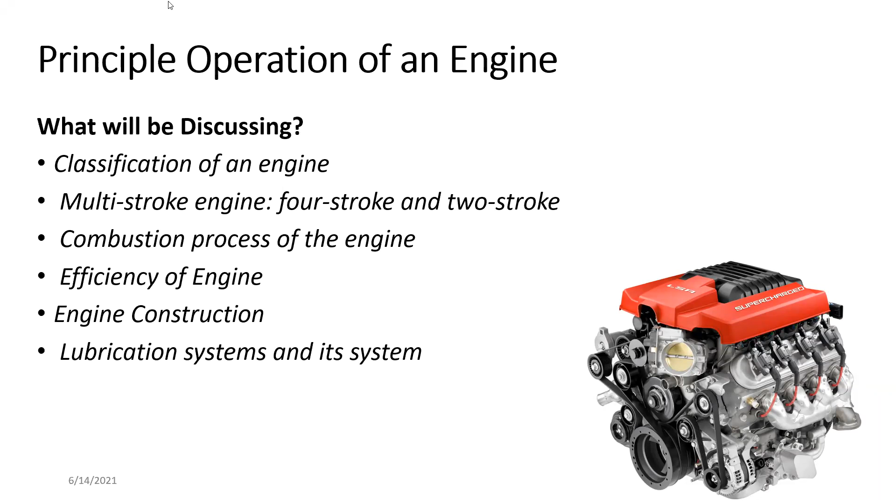First thing I need to explain is the engine. You have seen engines, and there are several types of engines. All of these engines utilize or convert chemical energy into mechanical energy. What we use in the vehicle is mechanical energy, while what we put into the engine as fuel is chemical energy.

After burning the chemical, combustion occurs. During combustion, heat is radiated, and that heat is absorbed by the combustion chamber, or it's the source for moving the piston in a normal engine. The same principle is used in different engine types.

All of these engines utilize and work in the same pattern. These engines, which work around the heat of the combustion process, are known as heat engines. They are classified differently based on type of fuel used, construction, and where combustion happens.

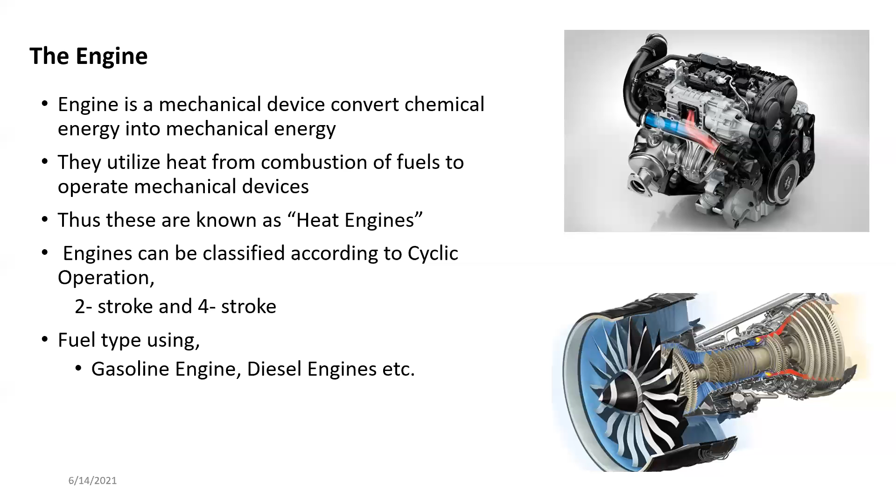Anyhow, since the one we are actually using at the moment is reciprocating engines or piston engines, we will be going deeply into discussing the piston engines, how they work, and systems like lubrication, fuel injection, ignition systems, and how airflow is affecting all of these things. We will be discussing most of these things in this module.

So the primary classification of any type of engine, as long as it's using any fuel, comes as external combustion and internal combustion engine. External combustion engine and internal combustion engines are very easy to understand or identify.

If an engine has a combustion process and energy generation or mechanical energy generation happening at the same place, such an engine is known as an internal combustion engine.

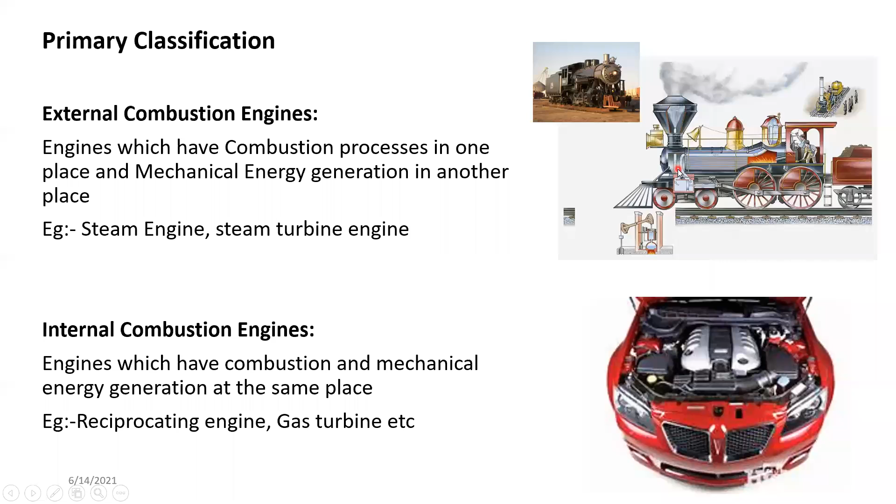In a normal automobile engine, it's completely different because the combustion is happening inside the cylinder itself. As a result, these are known as internal combustion engines.

Once we come to this external combustion thing, these are known as heat engines. All of these heat engines would be included into these two categories, external and internal. For your introduction, I have included steam engines and turbines, because in turbines the combustion also happens somewhere else, and the turbine is rotated in a different location. It's not that far, but it's two different locations. Then we have the internal combustion engine, which is the area we are actually concerned about.

So we have here Otto engine, diesel engine, and Wankel engine.

So, Otto engine, diesel engine, and Wankel engine. I'm not sure whether you are familiar with these names, but Otto engine means the petrol engine, diesel obviously is diesel engine. Wankel engine is a type of engine that can run on either diesel, petrol, hydrogen, or any type of fuel.

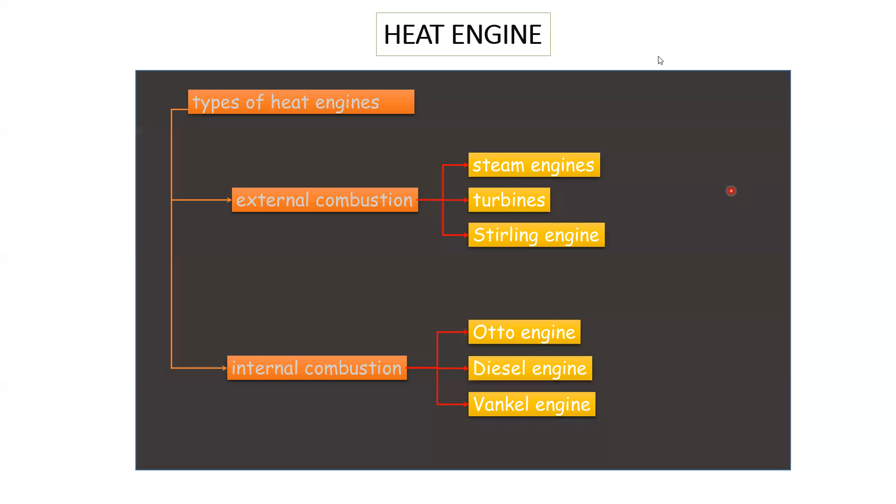So we'll go through this, and we'll discuss Otto engine, diesel engine, and then I can explain how the Wankel engine works.

So once we come to internal combustion and external combustion engines, there are advantages and disadvantages. If you compare these, internal combustion engines are compact and more efficient because the combustion and the mechanical energy production is happening in the same place, and it won't end up losing energy in the process, and basically it loses less material.

Most of the time the working fluid is a mixture of air and fuel. Working fluid is a term used in thermodynamics, which you will be learning later, to explain the type of fluid working inside a system. So the engine is considered a closed system, and the working fluid in that case is an air and fuel mixture.

Since these engines have mechanical components built in with the combustion, it's easy to start these engines. Internal combustion engines, since they are very compact and easy to operate, using them in automobiles is a very simple task compared to external combustion engines.

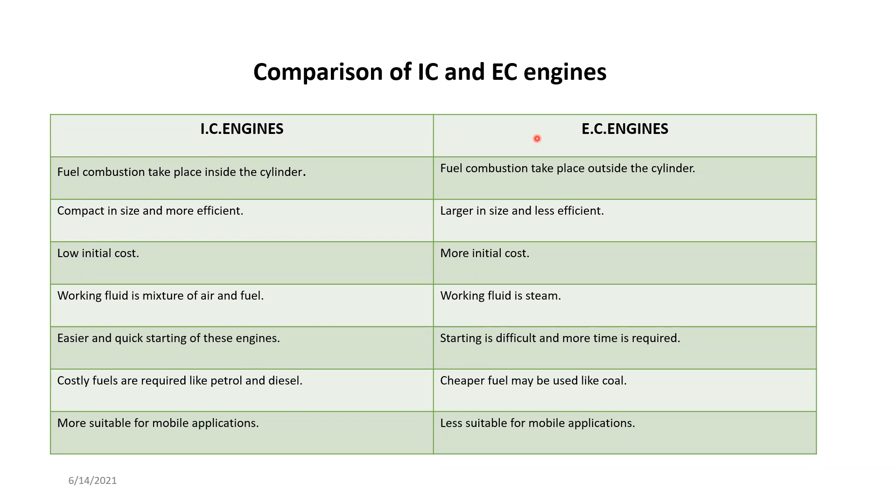Next, we move into something called a reciprocating IC engine. So if someone says IC, that means internal combustion engine, the short term for internal combustion. That's why it says IC. The type of engine used in the automotive industry is an IC engine, and these IC engines are reciprocating engines.

Reciprocating engines means it has a mass reciprocating, going up and down, or going from one place and returning back to the initial position before. So in a piston engine, or an internal combustion engine, there's a top position where the piston is moving, known as top dead center, and the bottom position where the piston goes down to and returns back.

So it's the reciprocating action of the cylinder, the action of this piston ends up creating mechanical energy. That mechanical movement will be converted into rotational movement using a mechanism known as crank slider mechanism. So crank slider mechanism, if I explain to you, this section is known as the crank slider mechanism.

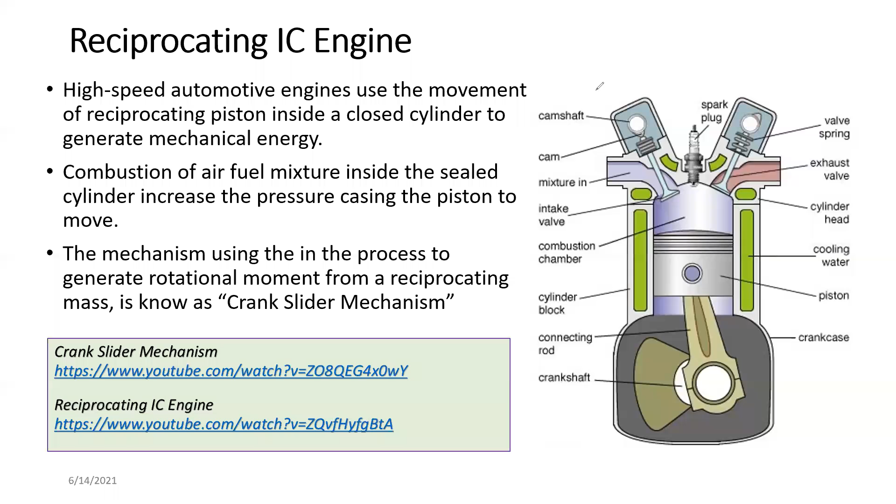And I know that you have learned these things, but I will just go ahead and discuss basic things also.

But this part, I don't think you have learned this. So even though this is the mechanical section of the whole engine operation, there's a thermodynamic side also attached to this, right? So there's a theory called the Carnot theorem, right?

The Carnot theorem says no engine operating between two heat reservoirs can be more efficient than a Carnot engine operating between those same reservoirs. So the Carnot theorem actually explains the thermal process of an engine. It explains how an engine is working, how the heat is flowing and how mechanical work is done.

So basically, the Carnot cycle is a very complicated topic. It's actually simple, though it's complicated. The basic idea of the Carnot cycle is to come up with a theoretical cycle to explain how the heat engine is working. If we consider any type of heat engine, all of these heat engines follow this process one way or another, right? So let me explain how this Carnot cycle works.

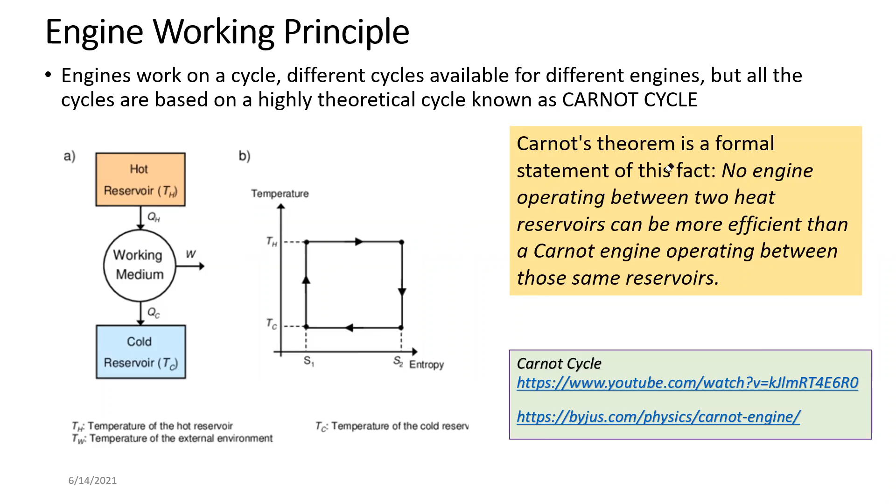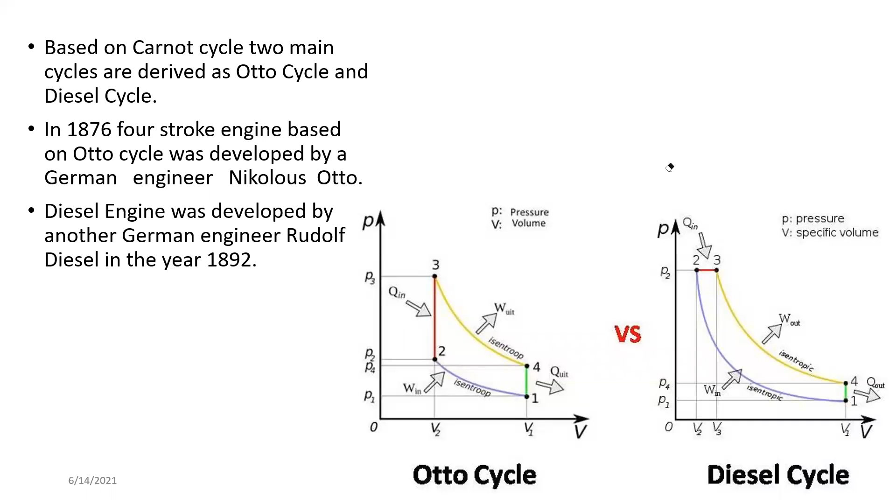But they were somewhat changed based on the practical limitations that we have in an engine when it is operating, and the shape of the graph will be somewhat changed with the actual engine. So in 1876 the four-stroke based Otto cycle, and in 1892 engineer Rudolf Diesel developed the diesel engine. Okay, so now we come to the Otto cycle.

So I know that you understand the four cycles, right? I know you understand the four strokes. So this is actually known as the sequence, right? So in a petrol engine and a diesel engine, there's a difference. The difference is in a petrol engine, you actually have to spark it, right? And in diesel engines, you don't have to spark, it will auto ignite, right?

It will auto ignite. So let us go ahead with the Otto cycle, and we'll discuss the diesel cycle next. I'm not actually going to go through what is suction stroke, compression stroke, power stroke, and exhaust stroke. You already know these four strokes, and you already learned this in your practical session as well. So rather than wasting time on something you have already learned in your advanced level, as well as in your practicals,

what I'm going to do is just discuss the graph. So basically the Otto cycle and diesel cycle, or any sort of cycle like this, is shown in a graph. This graph shows how the pressure and volume vary inside the engine. So it's like this. I'm going to draw a piston in a combustion chamber. Okay. So this is one position the piston can be, and the second position, the piston will be moving up here.

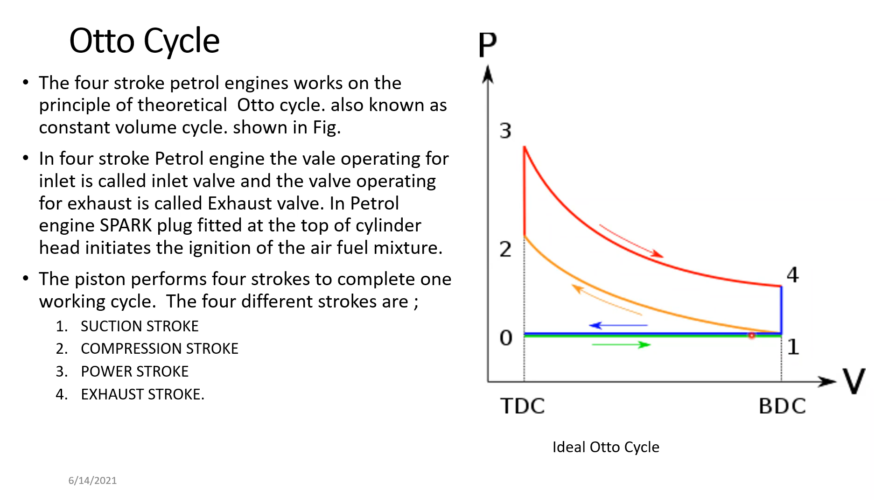So 0 to 1 is the suction stroke, and 1 to 2 is the compression stroke. 3 to 4 is the power stroke, and 4 to 0 again is the exhaust stroke. This particular operation is shown very well again in here. The same thing that I explained is here: 0 to 1 intake, compression, spark, constant volume combustion.

Notice that at this time the valves are closed, so as a result, the piston will move. If you look at the graph, you can see the one we discussed already, which is called the PV diagram. Next to that there's another one, called the actual PV diagram, meaning the PV diagram we get if we practically draw it from an actual engine. As soon as you see it, you can identify a lot of differences.

The main difference is there's no straight line; it's not very neat, it's more like two loops. The bottom loop is the pumping loop, where the piston itself takes in the intake or pumps the exhaust out, so it's called the pumping loop. The power loop is where the power is generated, where the compression and power strokes happen. That's why that section is considered the power loop, right?

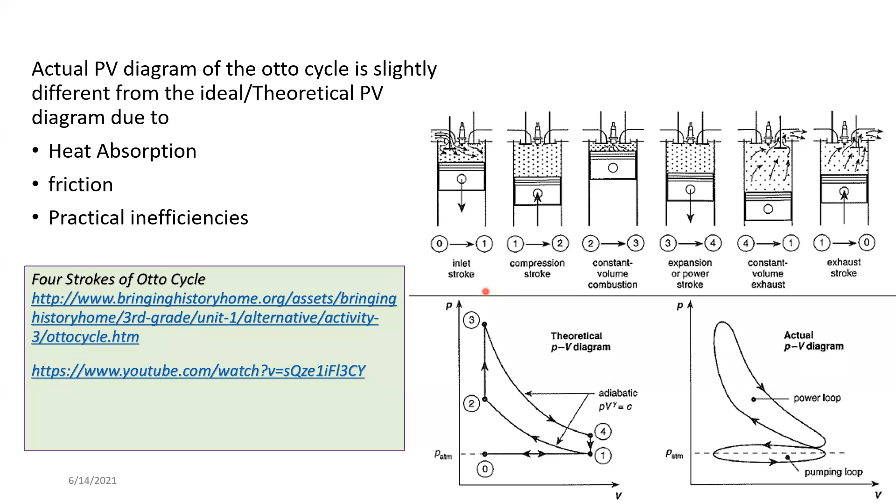So, the four-stroke diesel engine. The diesel engine also follows the same sequence, not the same cycle. Suction, compression, power, exhaust is the same sequence, but it operates in a slightly different cycle. If you move your attention to the graph shown to your right, 0 to 1 is as usual, 1 to 2 is as usual, but 2 to 3 is somewhat different.

Somewhat different meaning, if you can remember, earlier in the petrol engine or the Otto cycle, the graph was somewhat like this.

Okay, give me 1 second.

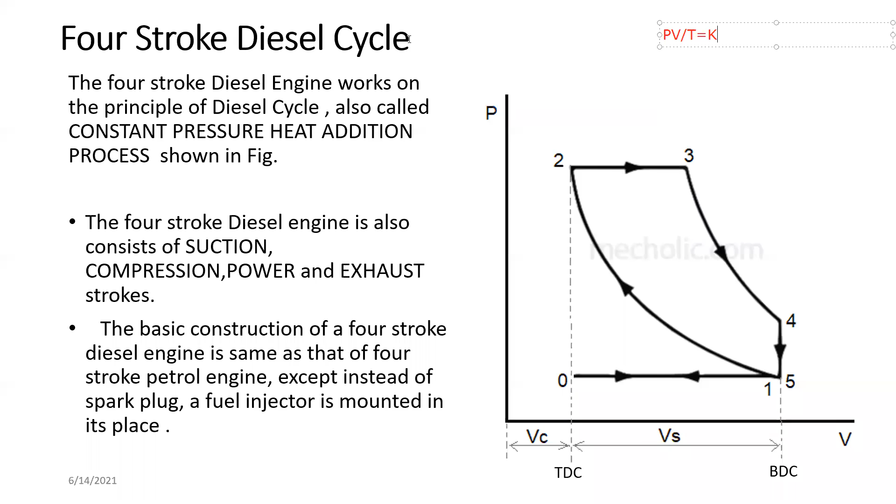That's why these are known as compression ignition engines, because they are ignited by compression. I will fix this image; until then, we'll go to the next slide.

So we've discussed the four-stroke engine until now. There are advantages and disadvantages, so let me discuss them.

These engines have a dedicated lubrication system, and since fuel is provided once for every 4 strokes, that means once for every 2 revolutions of the engine, this reduces the amount of fuel needed. There's no oil in the fuel, so less pollutants and cleaner air, and emission controlling is very easy.

On the disadvantage side, since you need a separate lubrication system, it's expensive with a complicated construction and more components needed, because you need a valve system or valve train to operate the valves.

The engine always has to be operated in a horizontal position, because the lubrication system works on gravity flow. It uses gravity to return the oil back to the oil sump.

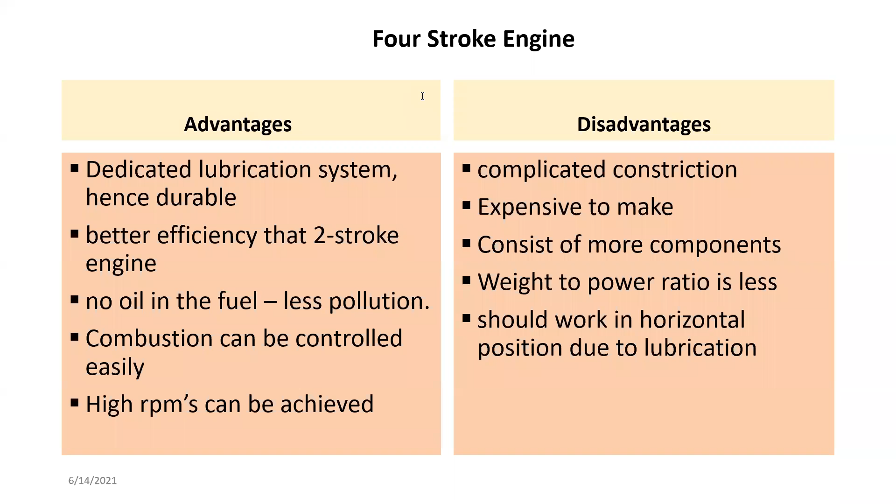So diesel versus petrol, if we consider these things, the basic difference between the two is the compression ratios. For a petrol engine, compression ratio goes from about 8 to 12. For a diesel engine, it's from 18 to 25 approximately.

Diesel engines are very lazy engines, and their RPM is lower compared to petrol engines' RPM. The reason is diesel engines need a particular time to combust, since it's not ignited directly - it will auto ignite once it reaches the correct temperature and pressure, so it requires a little bit more time.

In comparison, petrol engines have a very fast combustion process, so they can actually reach up to a higher RPM.

Diesel engines are known to have a higher torque value. Torque means the rotating force - how much force it can deliver when it's rotating. That torque value is actually higher in diesel engines even at lower RPMs.

That's mainly due to differences in engine construction, because diesel engines need to have a higher stroke length, since the compression has to be higher and it needs time to combust. Because of that, they need a higher stroke, producing higher torque values.

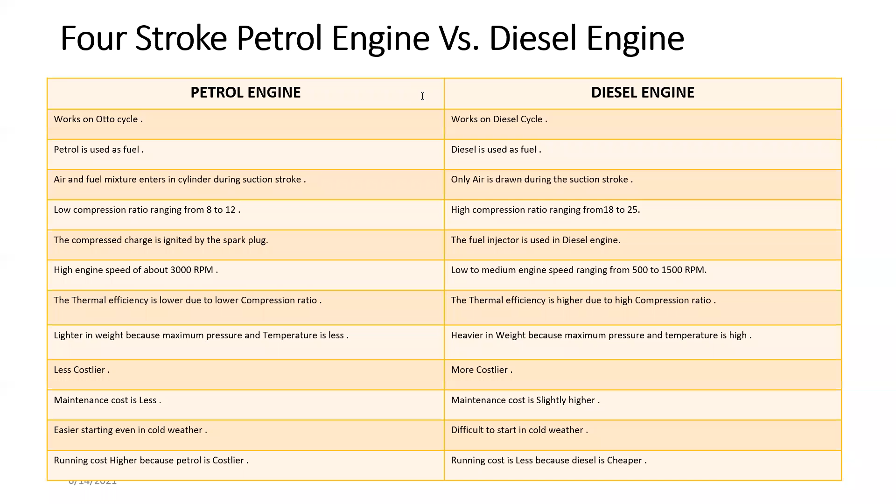Diesel engines are more popular as commercial vehicles than usual passenger vehicles or automobiles, due to their rough nature when running, and the low cost of diesel fuel compared to petrol fuel. Petrol engines have a more refined feeling because of low vibrations, as they operate at lower compression ratios.

A two-stroke engine is operating-wise very similar to a four-stroke engine, but instead of using conventional valve systems, they use something called a transfer port with a sliding valve system. As you can see here, the carburetor line coming from the air fuel intake port is here.

This is actually a valve, even though we never call it that. The valves in a four-stroke engine are called poppet valves, but these are called sliding valves. There's another type called rotating valves, which aren't in use now but were used long ago in World War II aircraft engines.

So this is more like a sliding valve where the piston itself acts as the opening and closing mechanism for the valves. As you can see, when the piston moves up and down, this section is closing and opening. Once it's open, the air fuel mixture comes in and goes to the crankcase. And once the exhaust side opens - these are called ports too - the exhaust port is also closed at this point.

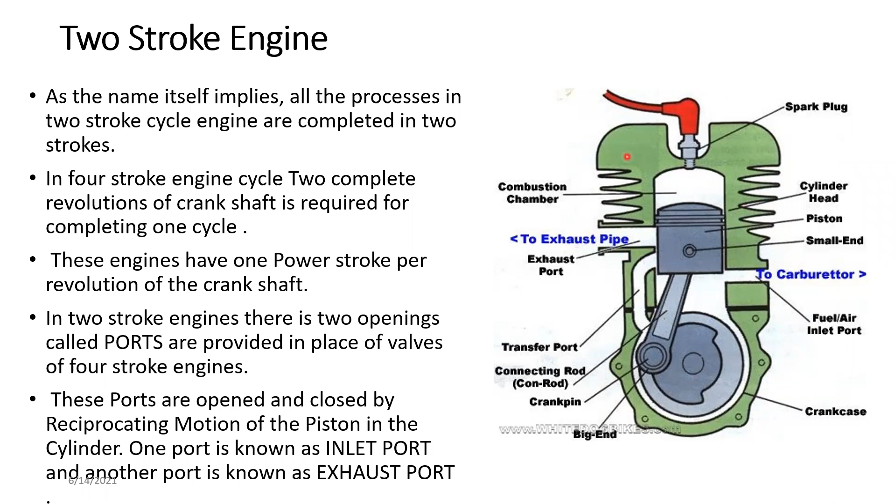This is the basic process of how it works. The air fuel mixture comes here, goes up to the transfer port, and it's closed moving upwards. The air fuel mixture inside is pressurized, then sparked. Combustion moves downward, the piston comes down opening the exhaust port, which forces the exhaust gas to go out.

While once it reaches the bottom dead center, the intake port is actually closed at that time, but the transfer port is open. So the fresh air fuel mixture will move into the combustion chamber at this moment. This actually combines two cycles, suction, exhaust and compression, into one.

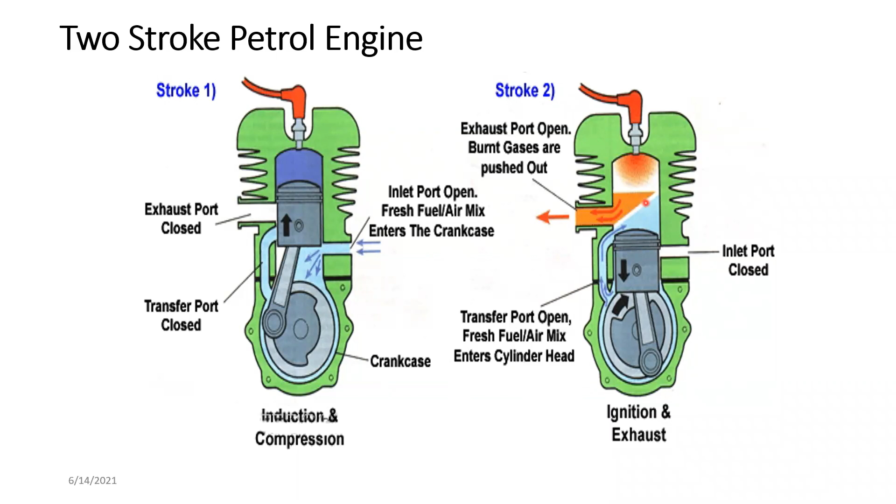The diesel type of engine is somewhat different because it has a small valve attached to them, but the operation is basically the same.

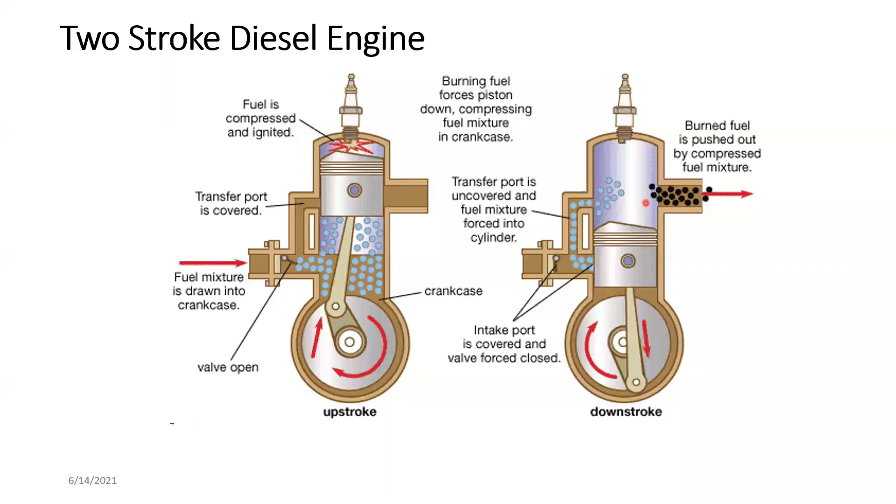So, two-stroke engine advantages and disadvantages. Basically it's simple, low construction cost, power stroke for every revolution, and can work in any orientation. There's no separate lubrication system; lubrication has to be provided with the fuel itself.

Since it's lightweight, the power to weight ratio is actually higher compared to other engines. And since it lacks a dedicated lubrication system, lubrication cannot be controlled very well, so it wears out faster.

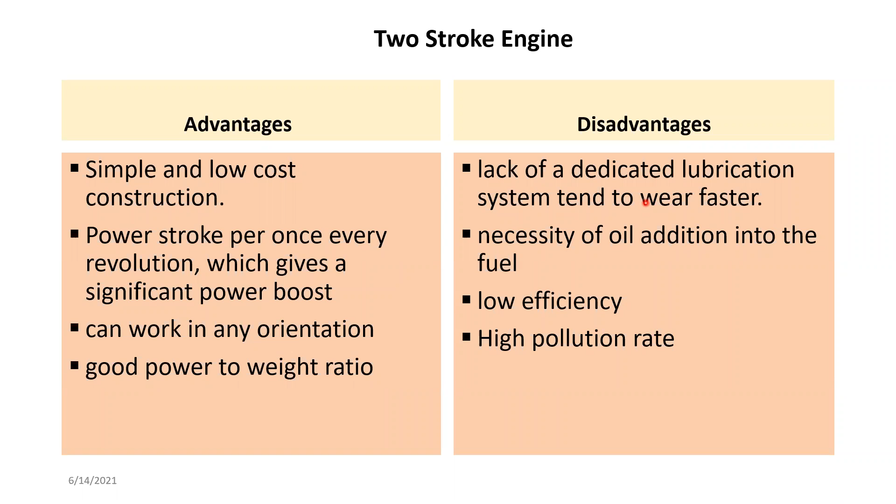There's a necessity of oil addition, which creates low efficiency as well as a high pollution rate, because pollution could not be controlled due to the oil being added all the time without any control in the engine. Because of these issues related to low efficiency and high pollution rates, two-stroke engines are not much used in automobile engines.

If we compare four-stroke and two-stroke engines, two-stroke engines are okay, but four-stroke engines have superior characteristics: higher thermal efficiency, better fuel control, low fuel consumption, low lubrication oil consumption, and lower emissions. Because of that, four-stroke engines are very popular.

With the newly developed manufacturing technologies and design software and applications available now, four-stroke engines can achieve even higher efficiencies and deliver almost the same amount of power as a two-stroke engine. So at the moment, because of that and other reasons mentioned here, four-stroke engines come up as the winner in this case.

But that doesn't mean two-stroke engines have no place in the world. They're still used especially where small light engines are needed, for example a snow blower, a tree cutting machine, or lawn mowers. These use two-stroke engines because of their lightness and fewer components.

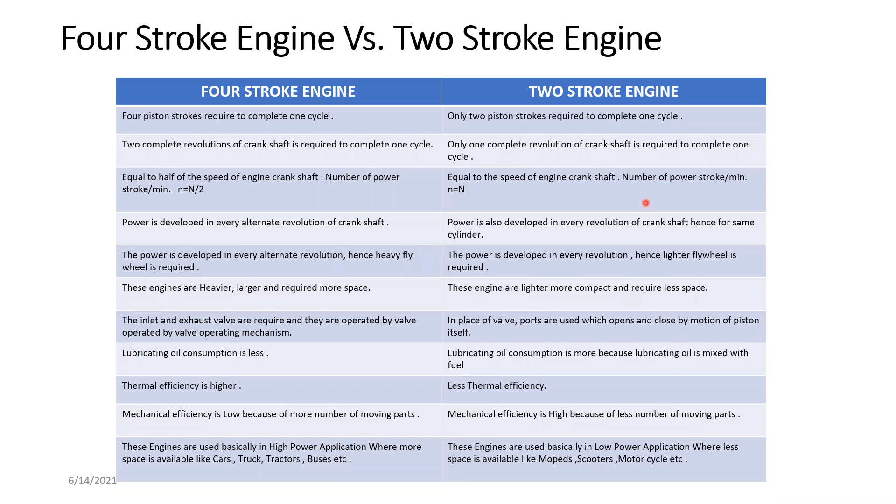Next we move into basic terminology. You likely already know about top dead center and bottom dead center, which is the section mentioned here. In addition, we have clearance volume and swept volume, also known as stroke volume.

The clearance volume is the whole volume between the top of the piston and the top of the combustion chamber. This whole area is actually your combustion chamber. This is the cylinder, and the area marked here with the darker pink color is known as the clearance volume.

Clearance volume is the amount of compression that the air fuel mixture is getting. Once the piston moves from BDC to TDC, the whole volume inside the cylinder will be compressed into the volume that is the clearance volume, the space between the top of the piston and the top of the cylinder itself.

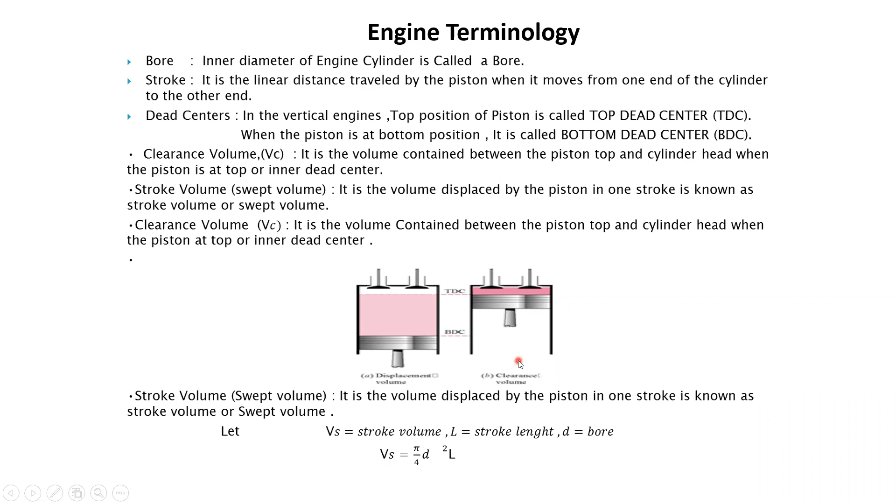Next, the compression ratio. The ratio of total cylinder volume to the clearance volume is called the compression ratio. So the compression ratio means the ratio between the total cylinder volume, that means we add clearance volume to the swept volume, then we have the total cylinder volume. The ratio between that and the clearance volume is actually known as the compression ratio.

So basically, the ratio between the cylinder volume to the clearance volume is actually called the compression ratio. So the equation is actually shown here, and how to get the equation is also shown there. Next, for a petrol engine R varies from 6 to 10, and for a diesel engine 14 to 20. Piston speed.

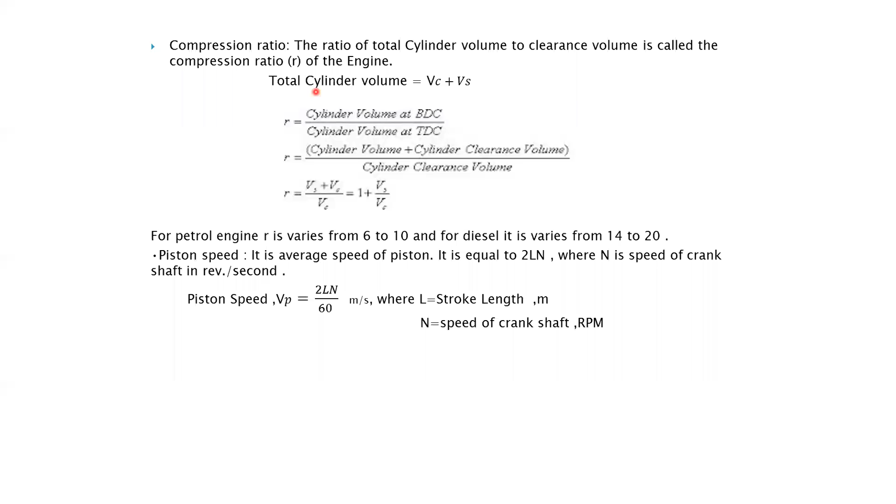So the next section is actually the power. Before we discuss the power, we need to have a small discussion about it. As I told you earlier, we usually show the operation of the engine using a PV diagram, which is shown in the image below. In a PV diagram, the area covered by the PV diagram is actually known as the work done by the gas, right? Work done by the gas, or how much power is actually delivered.

So this ash colored area is the power which is actually delivered, or the work done. The problem with this particular power delivered is it's really hard to measure, right? The reason being, it's actually a dynamic thing, so it's always changing, the parameters are changing. There's no easy way to calculate these values. So it can actually be measured using equipment called an engine dynamometer, which we can fix an engine into and find out how much power it's actually making.

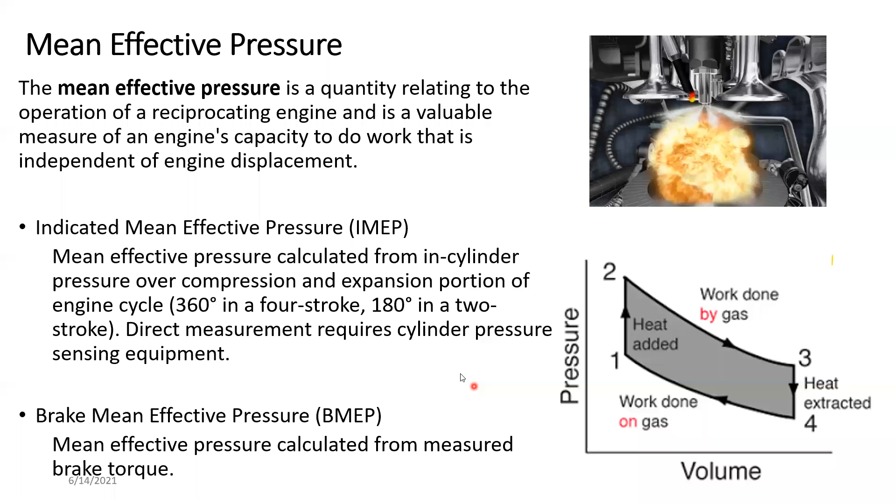Then for that particular mean effective pressure, in order to have that particular mean effective pressure, fuel delivery and ignition can be designed separately. So by balancing these two, the engines are developed. So the only thing you have to be worried about is the mean effective pressures, and just remember how to explain these things, and use them to find the engine power.

So as I told you earlier, there are two engine powers: the indicated power and the brake power. In order to find the indicated power, the equation is IMEP, the indicated mean effective pressure, into K into capital N into capital L into capital A into simple n over 60, right? Here, capital N is the number of cylinders, L is the stroke length, A is the cross-sectional area of the cylinder, so with the bore you can find that. And simple n is the RPM, revolutions per minute.

And K is a constant, where K is half for 4-stroke engines and 1 for 2-stroke engines, right? So BP, the brake power, and IP, the indicated power, both of these you can calculate. I'm not going to give any calculations now, but make sure that you remember these equations.

We will do something like a tutorial class, where I will give you the equations and a list of questions which you have to answer first and come to the class. You have to submit it to us first, right? Then what we do is we discuss it in the classroom, and only then will we go for the marking.

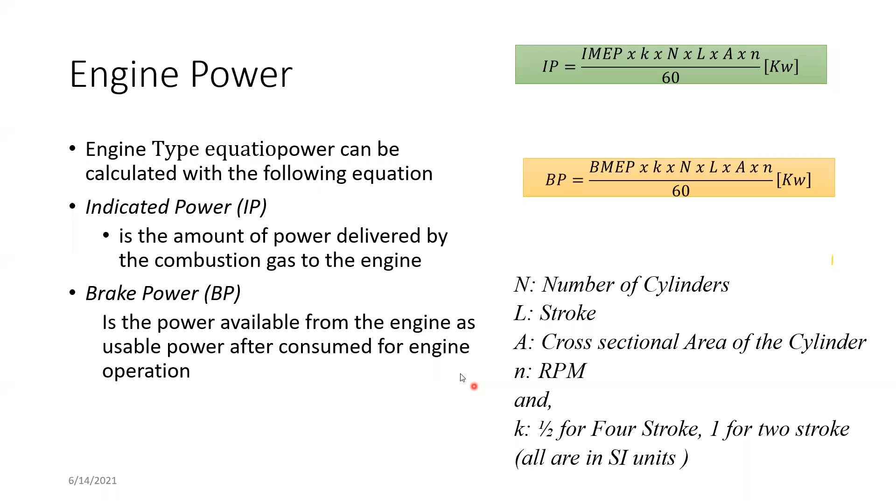You will answer them also and send them back to us again, right? So what you lost in the first one will be returned from the next one. I will let you know about this later.

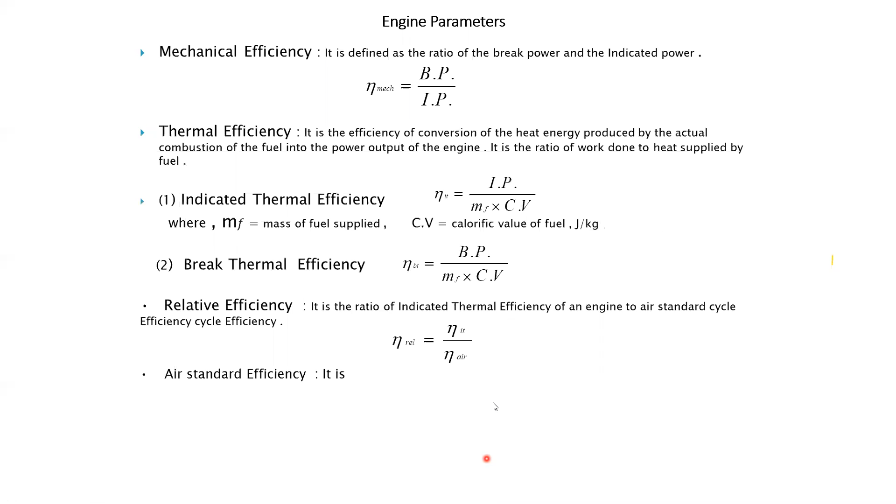You don't have to worry about these terms, you just have to know what to put in them. So don't worry about the air standard efficiency or relative efficiency equations, because we will not go too deep into this. But the specific fuel consumption equation you have to learn. Specific fuel consumption means how much fuel is consumed per certain amount of energy. In this case, it's the mass of fuel consumed in kilograms per hour, once you use this equation.

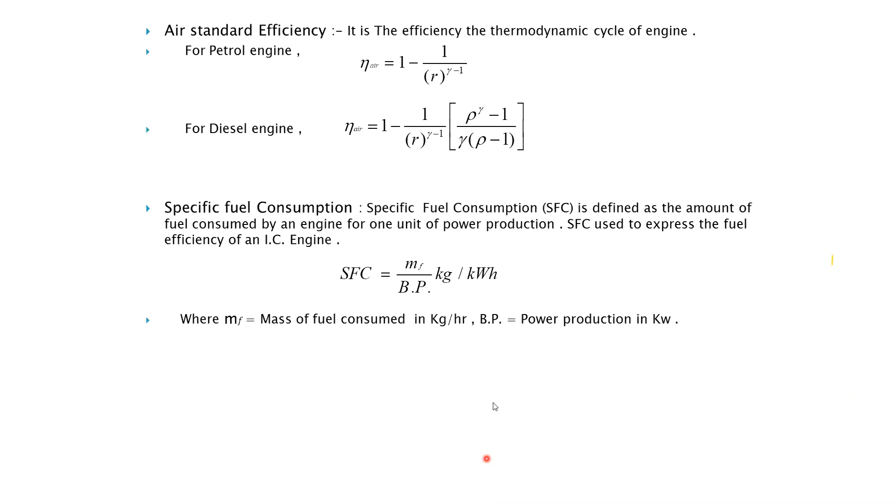And the other thing is, when you are using these equations, you always have to use the standard international units. Don't use inches or kilometers or something, just use meters. Everything is in meters. If it is a distance, it's in meters. Power is measured in kilowatts, not anything else. And when you are answering, you always have to put your unit, right? You always have to put your unit.

Okay, so next is something called the Wankel rotary engine. This is a four-stroke engine, but it's somewhat different from a usual engine. It's very scarce at the moment. In a reciprocating piston engine, the main disadvantage is having valves, which consume a certain amount of the energy produced inside, and having a reciprocating mass. A certain amount of mass is moving up and down, which means energy loss.

Most of the energy will be wasted in moving this component. That's why most high performance vehicles have very light pistons and light components inside the engine to reduce the weight of the reciprocating mass. When you have higher mass, the inertia increases, which makes it difficult to move the item, which will end up making the engine comparatively inefficient. To fix this issue, the Wankel rotary engine was introduced.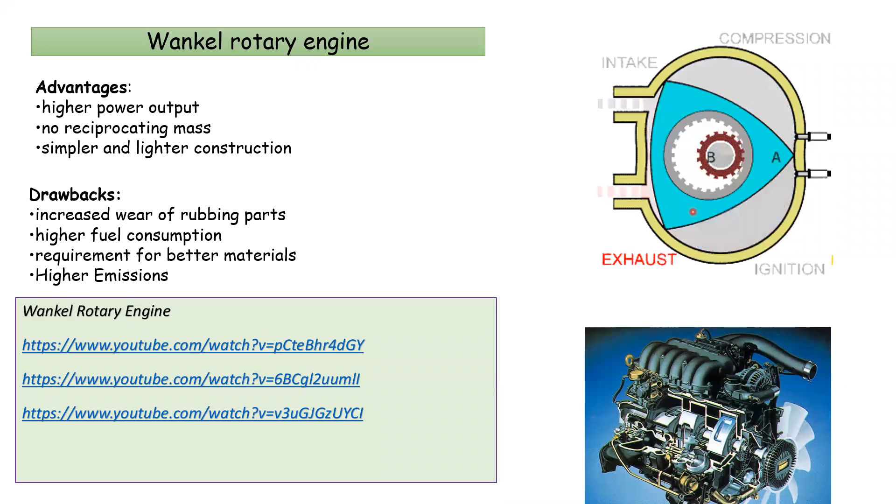There's a lot of research going on into these engines in order to bring them back into use, but it does not seem like they're going to come back anytime soon. So I have attached some videos for you guys to look at and understand. There's one video showing the operation of the engine very well through a slow motion camera. So I highly recommend you watch it just to understand how this thing actually works.

Yeah, so for this whole unit number 2, I want you guys to do a group assignment, right? So what I need you guys to prepare is a presentation about the multi-cylinder 4-stroke engine. So multi-cylinder only, so no Wankel engine, right? The report should do this.

So include parts of the engine, construction of the engine, working procedure of the engine, valve train operation, effect of the valve timing, valve clearance, compression ratios, and intake and exhaust manifolds, how they work, what their effects are. Those are the parts you have to cover in this particular section. So construction-wise, why there are ribs in there, what sort of water coolant channels, how they are working. These sort of things you have to discuss.

So I expect each group to have around 8 members. I think there will be 2 groups which will have around 9 students per group. All the presentations you can submit through LMS. I will let you know whether you have to do the presentation or not. So grouping, I think there's a question coming. Yeah, so I will come back to that later. Next. So yes, the deadline is 5th of July.